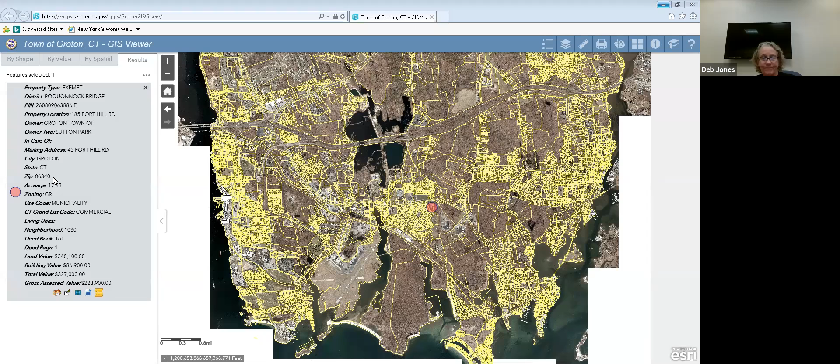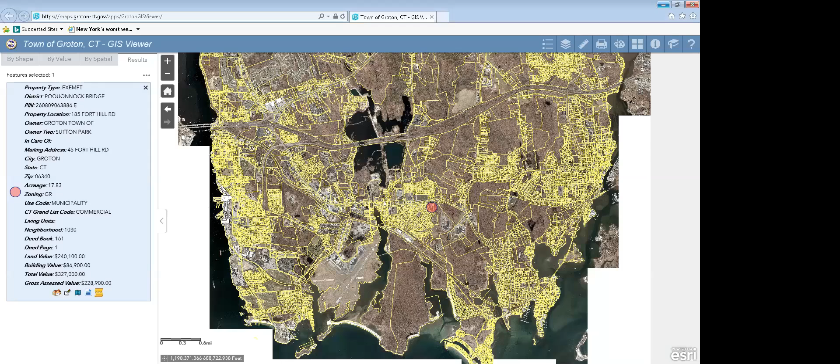The project is to demolish an existing bathroom located at the park that hasn't been used in a while. We're proposing to demolish it, and zooming in now to show you where it's located in the park, kind of off to the side. It's in close proximity to Fort Hill Brook, which runs along this property line, this yellow line here. So that is the basic project.

I've got a site plan to show you all too, with some details. Hey guys, I'm confused looking at this picture - me too, I thought it was like Sutton Park. So did I. It is Sutton Park, yeah. Is the structure that small black square? I don't know, Dave, I have that same question. I'm sorry, I misspoke.

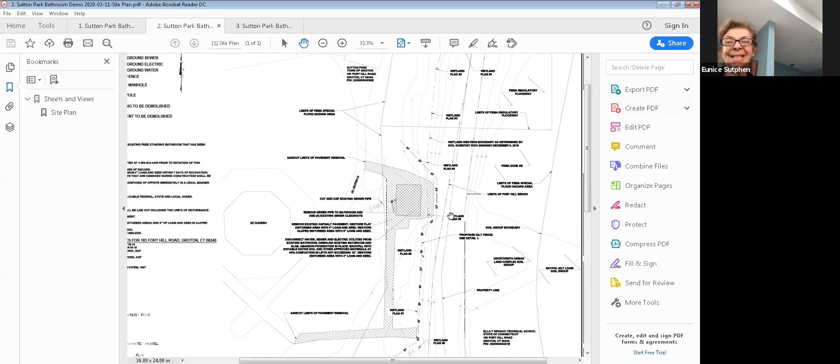Everyone can see the site plan now? Yes, okay so this is the site plan that was submitted with the application. This is the gazebo at Sutton Park, where the red dot was on the GIS view. And this here is the proposed bathroom to be demolished, the cross-hatched area, and the hatched area around that is asphalt sidewalk and some asphalt pavement that we are proposing to also demolish.

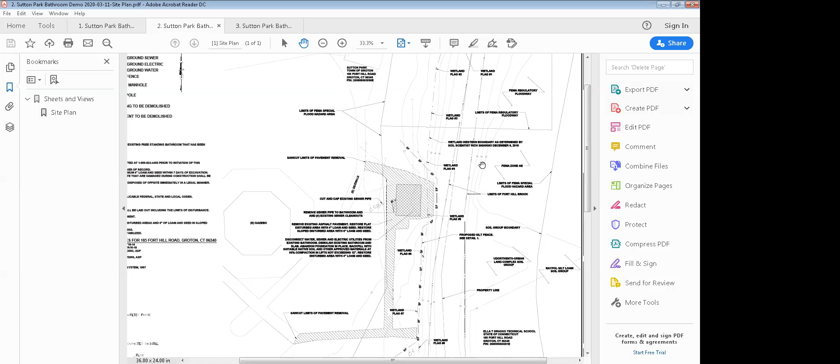So for erosion control, we are showing a silt fence here by this line, this SF line, going around.

On our landscaping sheet, we're also showing jute netting to go down where we take out the asphalt and restore it with native plants and grass.

So we're proposing, the plan shows, to disconnect the utilities to the bathroom. It's got water, sewer, and electric, so we're going to disconnect those. We'll be hauling away all the construction debris, the building materials, and asphalt directly away from the site during the demolition.

If there's no questions on the site plan, I have a landscaping plan to bring up too. I have one question on the site plan, please.

Go ahead, Eunice. Could you just run your cursor down where the wetland is, please, Tom? I see the wetland delineation, it's really small on this screen. I know I'm blind, but if you could just run that cursor for me, please, where the— Okay, yes, sure.

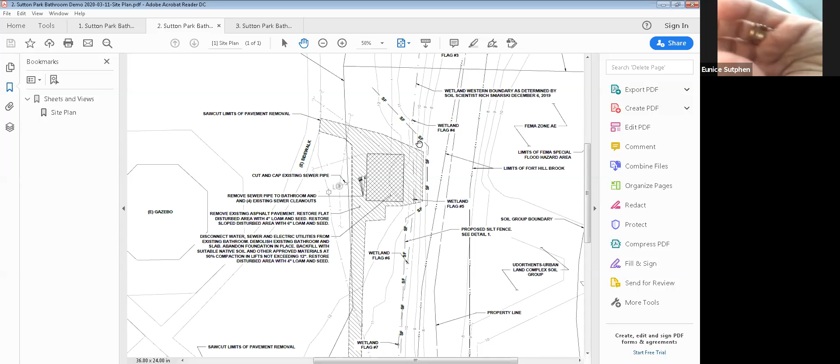I can go by. And Tom, are you planning— how are you going to— you're planning on first taking the building down, and then bringing in your big machine to scrape that asphalt away. So you'll be on the side of the pavilion, and are you going to scrape that asphalt towards the pavilion? Yes. Okay.

Yes, I think they would be using a backhoe. The backhoe would probably be closer to the gazebo, scraping the asphalt in the direction of the gazebo. Okay, so all the material is going to be removed from the site? Yes, it will.

Tom, do you want to review the landscape plan? Sure.

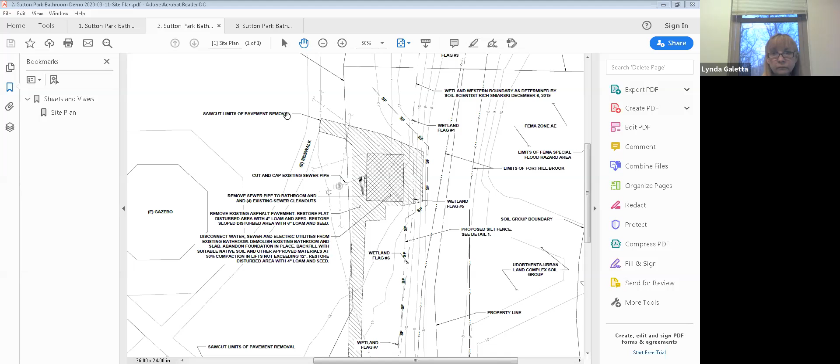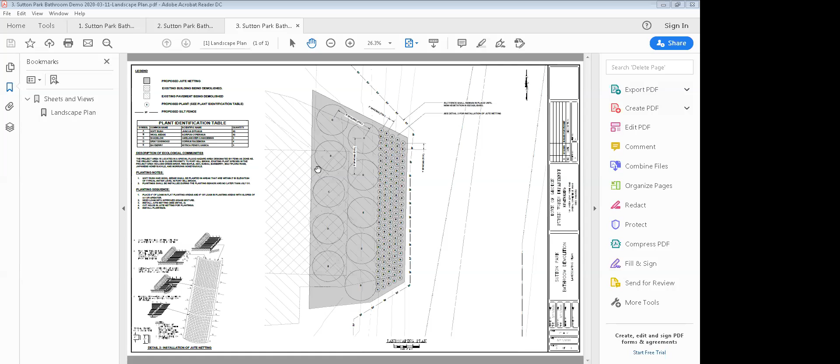Along Dave's question, in the future, is the sewer connection going to dictate where that new bathroom might be? Because this is a terrible location for a bathroom. Agreed. And while a new bathroom will certainly be connected to sewer, I don't think it will dictate it, other than it probably won't be any further south into the park, because they're probably not going to want to run the sewer. There's a large sewer line, but there's not a lateral. So it could be on the other side of the gazebo or somewhere, but you're absolutely right, this is a terrible location.

So do you need any kind of motion to accept this? Not at all. You can't take action on it tonight, the earliest is in two weeks. I do suggest you go take a look at it. Behind this building, the stabilization method was paving, down into the brook just about. So all that will be removed and the area will be revegetated. Definitely take a look at it, and watch the gazebo, because it's very close.

We need to classify this. Yep, that would be great. I'll make a motion to classify this as minor. Do I have a second? Second it. Member Block, thank you. All those in favor? Who seconded? Barbara Block. Okay, thank you.

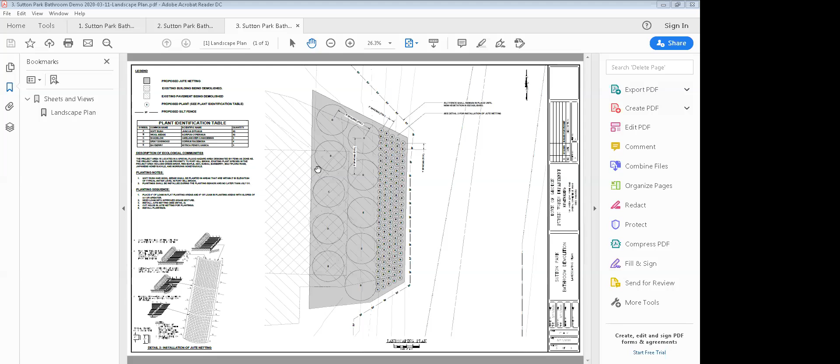Barbara Williams, Aye. Barbara Block, Aye. Bob Ashworth, Aye. Eunice Sutphen, Aye. And I'll vote Aye. So it's classified as minor, and we're going to look at it separately.

All right, great, that's all set. Thank you, Tom. Thank you, Tom.

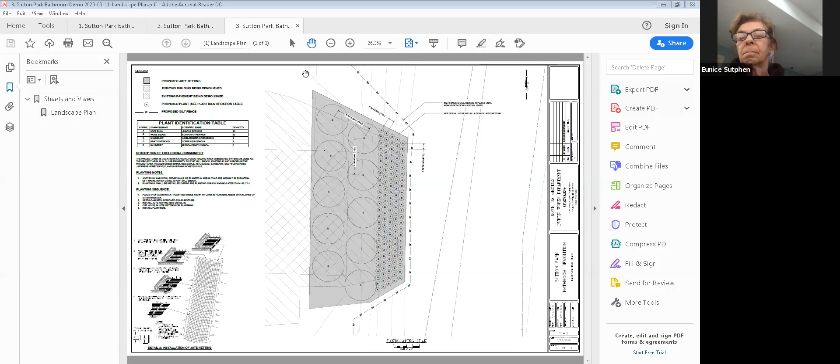There are no new applications. I'm just going to get Tom's stuff off of there and put the agenda up. There we go. Whoa, so there we are. So that's all right, correct.

There are no new applications pending on Commerce Park. Do we have any action on that? I think Bruce has an update. For LBI Commerce Park, we're still waiting on a lot of things from the applicant and Greg Pettis, the engineer - stormwater calculations, hazardous materials. Right now it's still an incomplete application. I haven't got any indication of when it's going to become complete, but hopefully I'll have more updates next meeting on that one.

Is there anything further on Fields of Fire? Same type of thing with Fields of Fire. I did reach out to Tom Vignato today, and he said he still wants to pursue this permit as soon as possible. He said he's making changes and should have something in front of us for next meeting. That's what he told me today. Okay, very good.

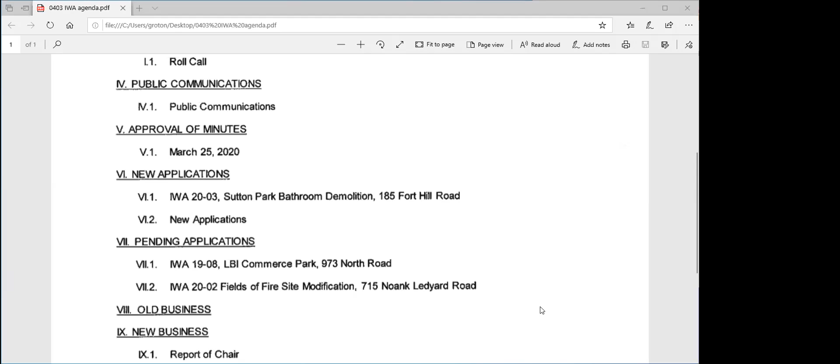I have nothing to report. Do you have anything, Deb? Eunice, did you want to? Either one of us - this is Eunice Sutphen. I emailed Deb today. There have been a couple of people - I'm on the board of trustees of the Peace Sanctuary, and a couple of people have contacted us worried. They're renovating a house on High Street that backs up to the Peace Sanctuary property, and it seems like they're really stretching that flatness, if you will. It's a pretty steep slope back there, so I asked Deb if she had any information about that.

I took a look at it today, took some pictures. All the trees are removed, it is a barren site. Bruce had some contact with the newish property owner and called him today. Bruce, do you want to relay your conversation? Yeah, sure. So the new property owner kind of inherited this property - it was a mess before he bought it. He bought it late last year.

I talked to him about it. He's obviously cleared a lot more, done a lot of grading and some filling. He acknowledged the slope is probably steeper than a 2-to-1 ratio.

When I was out there, I witnessed a water course just to the north of the property. The applicant had someone go out there and they told him there's no wetlands on his property, which I tend to agree with. I don't think there's wetlands on the property, but I explained there's suspected wetlands just off the property, what the upland review area is, and instructed him to submit an erosion and sediment control plan with the town, get the off-site wetlands flagged if there are any, and show any activity that may have occurred in the upland review area.

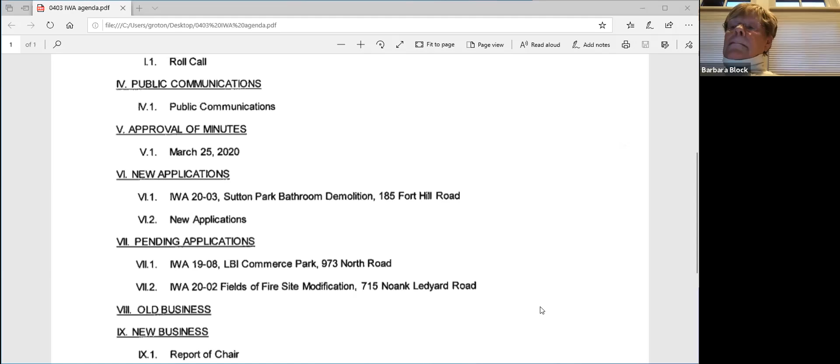I have one other thing. I was contacted by a property owner at the very northern end of River Road, 1206. The property is in Groton, but it takes its access from Stonington, and it comes across basically the headwaters of the Mystic River. It's an existing bridge, and he needs to strengthen it for oil deliveries and that sort of thing.

He's just going to add some stringers to the existing abutments. It's not going to be placed by machinery; there might be somebody standing in the brook to guide the stringers to support the bridge. I talked to Dave about it, and we agreed that it's something that doesn't need a permit since there's really no work being done in the wetland—it's just laying stuff on top of an existing bridge. So I just wanted to let you guys know about that.

Super, thanks, Deb. That's all I have. All right, done.

Before we make a motion to adjourn, this is awesome to do by Zoom, but I want to state that for a greater application, it's very difficult to see the detail on the plans that Tom showed us. I don't know if it's just me looking at my phone, but that's a little tricky—I wanted to magnify it to make it bigger. It's definitely easier on a laptop to see. I'm doing it on an iPad and I could do that.

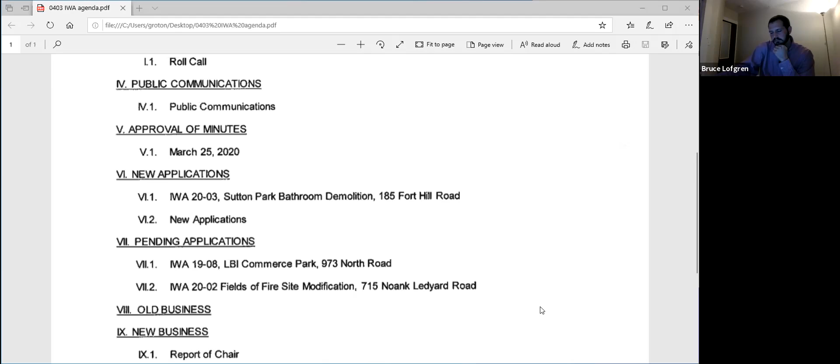Thanks so much, you guys. Thank you all, bye-bye. Very good. Aye, bye. Hey Bob. Hey guys.